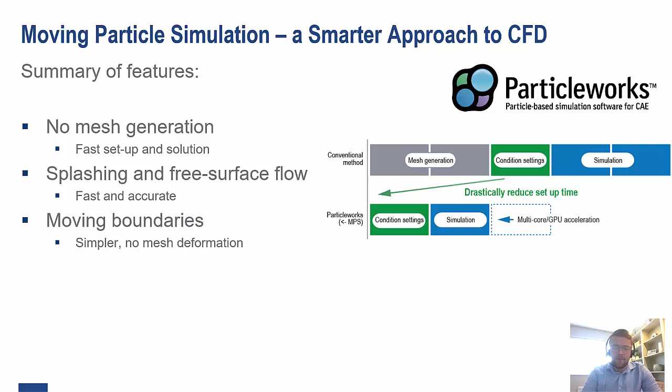And again, without the necessity of a mesh, moving boundaries are far simpler to deal with. So we don't have to worry about things like mesh overlap, mesh deformation. Overall, it just means that our pre-processing time is far, far lower than a traditional mesh-based CFD. Now, the physics behind the MPS method is exactly the same as traditional CFD. It's still solving the Navier-Stokes equation. However, it's just a question of how we solve those equations.

So the MPS method was actually originally proposed by Professor Koshizuka of the University of Tokyo, and he is one of the co-founders of Prometech Software, the company that develops ParticleWorks, back in 1996. Now, ParticleWorks is actually the only tool on the market which uses the MPS method.

There are other particle-based CFD tools on the market that use a methodology called Smoothed Particle Hydrodynamics, or SPH. However, this methodology was developed for compressible fluids, and is not well suited for simulation of any fluids that are incompressible. ParticleWorks is the only particle-based CFD tool which was designed for simulation of incompressible fluids.

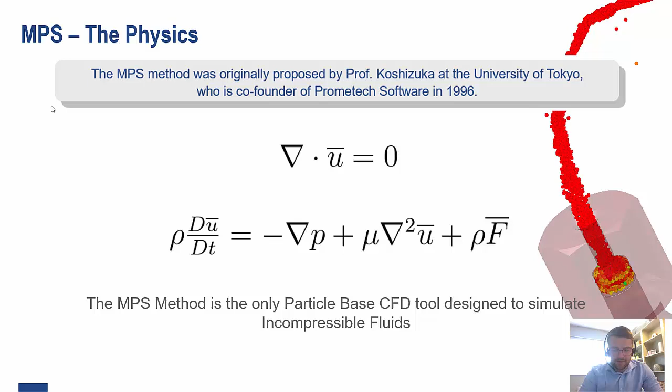So the way that we differ from conventional CFD is how we solve the Navier-Stokes equation. So conventional CFD is solving on the nodes of a fixed mesh. This is like taking the outside point of view of solving the equations, which we could call the Eulerian approach. The MPS method, however, is solving from the point of view of the particles. So we're taking the Lagrangian approach of solving the equations, and this means that the particles kind of act as a moving mesh that moves with the fluid and allows us to resolve the free surface very accurately and in a very efficient manner.

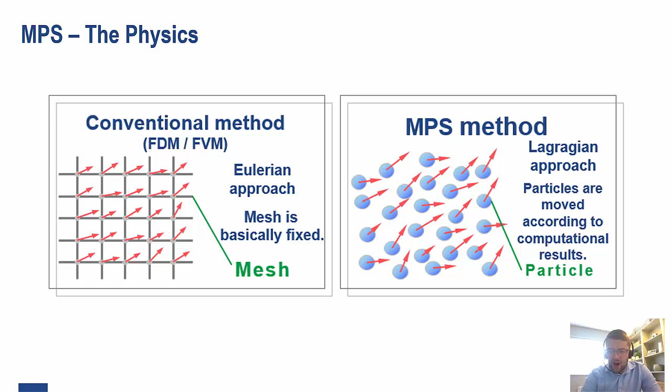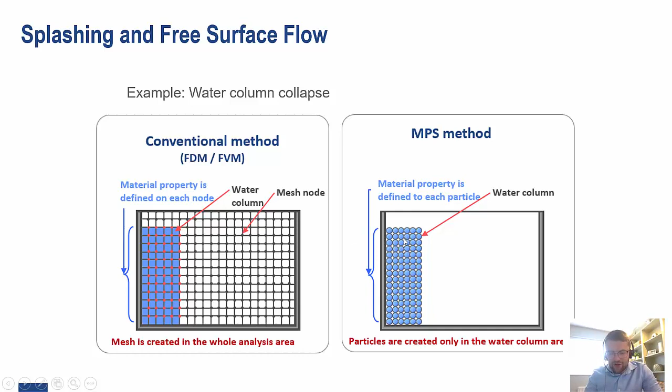The reason this is so efficient is because, well, in the conventional CFD, we are wasting a lot of computational time in regions that we're not interested in. So we can see here that the water is in this blue column on the left-hand side here, but all of these white nodes are just wasted computational time. In the MPS method, we are only solving where the particles actually are, so far more efficient before we even start the simulation.

As the simulation then progresses and the free surface evolves and moves, we can see that the only way we can capture that free surface accurately at all time steps is to have a very fine mesh throughout the entire domain, which clearly is going to massively increase the number of nodes and massively increase the computational cost of our simulation.

Now, in the MPS method, there's no requirement for a fine mesh everywhere. The particles will act as their own mesh, and it means that we're able to resolve that free surface very accurately, even if we didn't know the fluid was going to go into that region. So you can see in this case, we've hit this far wall and splashed up and out of the box.

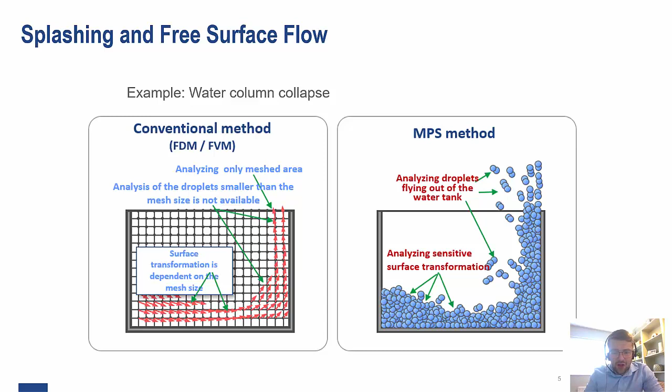However, we're still capturing that free surface very accurately, whereas in the conventional method, we may not have realized that the fluid is going to go into this region, so we either haven't meshed in that region at all, or we've simply meshed it very coarsely, which means that we're going to lose information and overall the accuracy of the simulation.

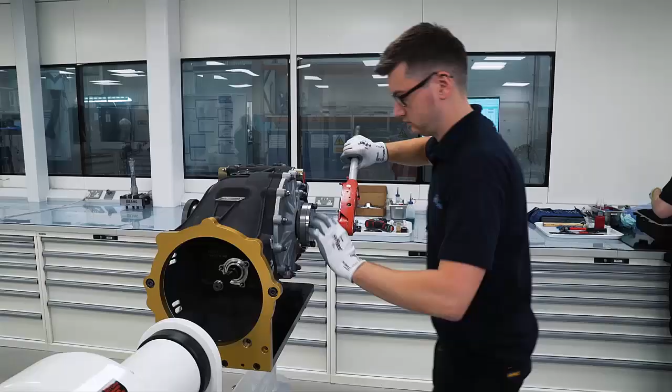Lubrication has always been of paramount importance within the transmission, and whilst we have the tools to analyse the pressurised system, the splash element has always been a best guess during the design phase. This means that in order to prove our thinking, we had to deploy costly 3D printed clear casings and produce a full set of the components of the design to run on our gimbal rig.

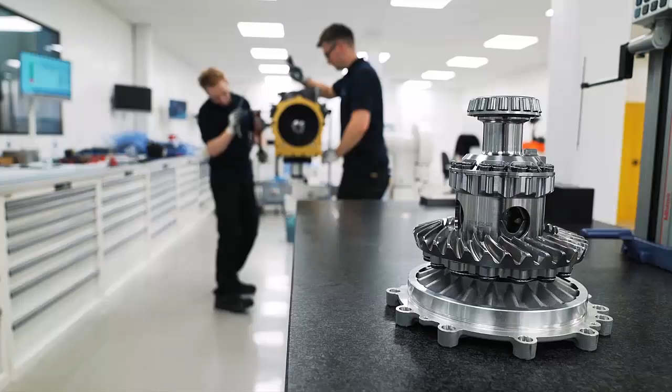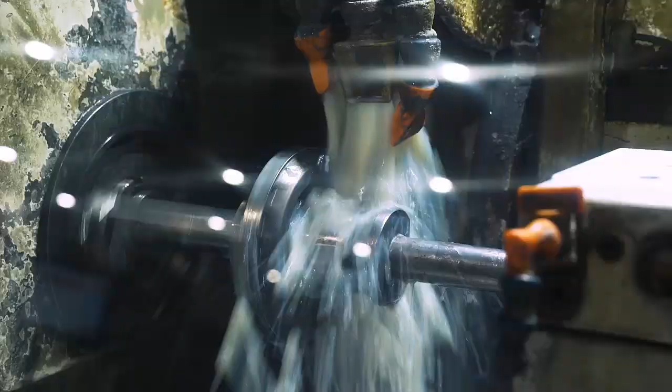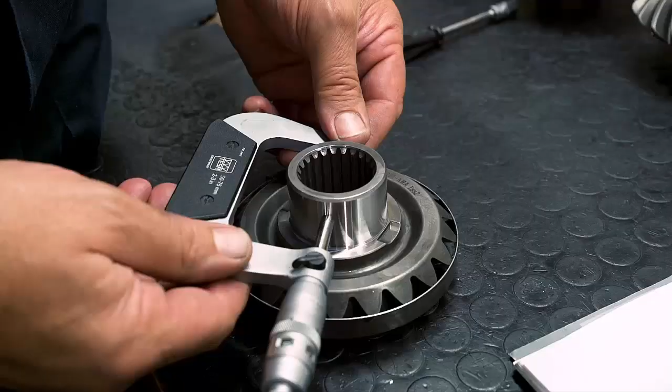The downsides to this is having to produce the 3D casings. They're costly, it's time consuming. We have to have a full set of internal parts produced before we can test. And in motorsport, time is always the biggest challenge. There's always a lot of pressure from the customer. There's always a lot of internal pressure to get the project finished on time, delivered, and right first time.

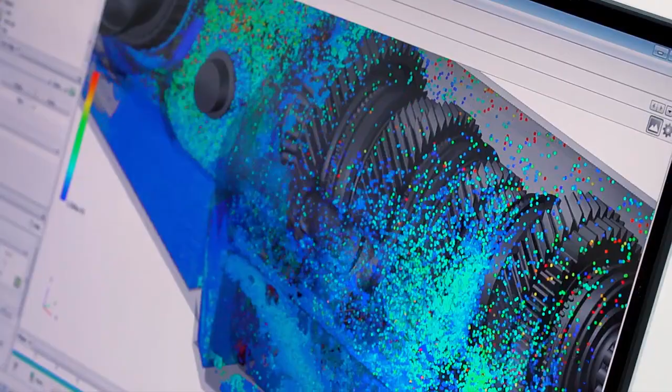We've always been aware of traditional mesh-based CFD and that it could help us in this situation and give us an upfront look at the problems that may arise. We became aware of particle simulation and started to investigate the tools available, as it seemed like the perfect solution to our problem. So EnginSoft arranged a trial for us. During that time we did some testing, so correlation testing, virtual versus reality if you will, and I have to admit I was surprised by the correlation that we achieved.

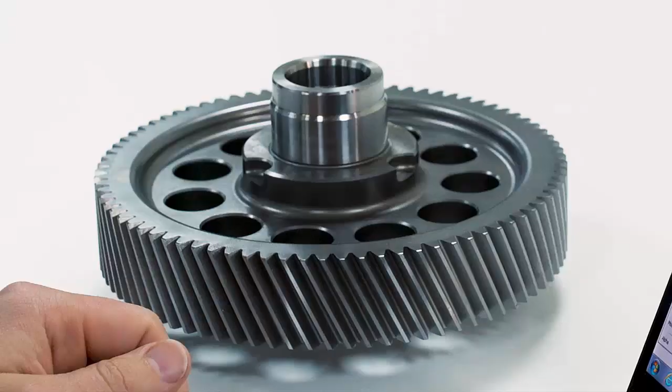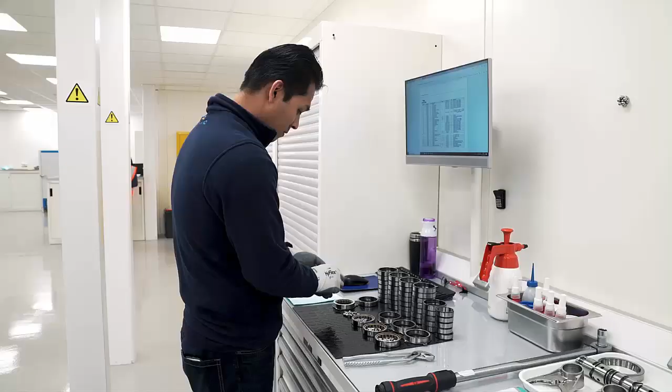EnginSoft and Particleworks stood out to us, basically in terms of both the ease of use of the software, the solve time and the support structure surrounding the software. That allows us the ability to deliver a right first time project, meaning that we don't need to have an expensive prototype test rig. Training other members of the team to use it has been very easy. It seems very easy to pick up and be able to run simulations very, very quickly.

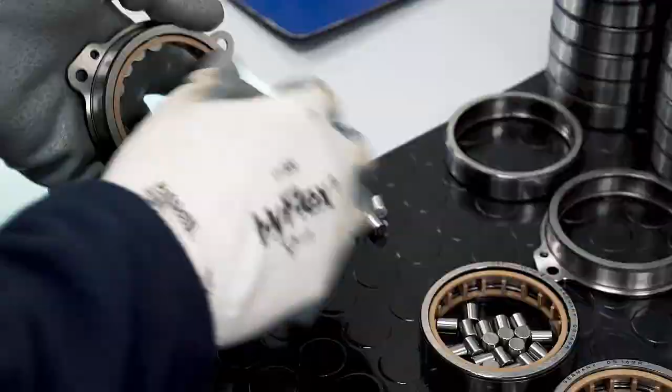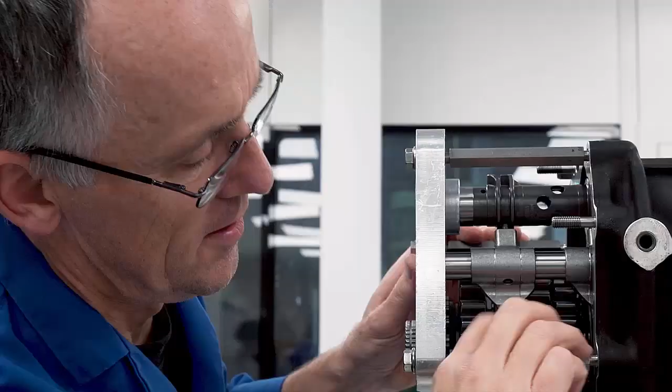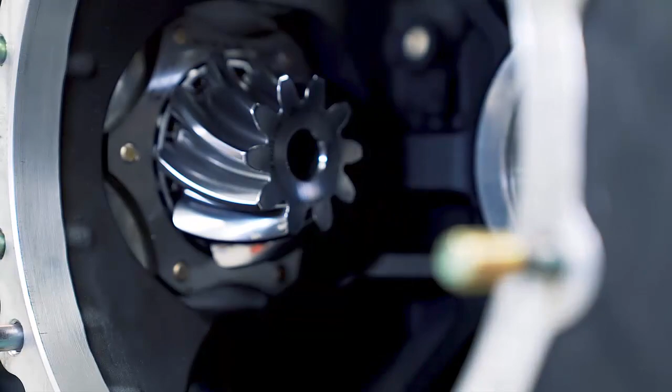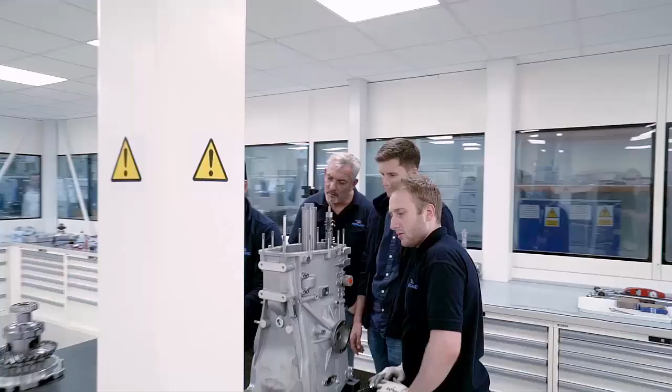During the trial period, we saw so much benefit from the software that the transition to a full license became an easy decision. Overall, this method offers us a huge time saving and allows us to do this work up at the front end of the project rather than at the end. Typically, we would go from CAD to test in around 10 to 12 weeks. With Particleworks, we can do that in 3 days. I feel that having this capability gives us an edge over our competitors.

There are many other benefits and improvements that we're finding all the time due to the insight given to us by Particleworks. The motorsport industry moves at such a fast pace that it's vitally important that Hewland stay on top of new technologies. Efficiency is becoming more and more critical in transmission design, and having the upfront capability allows us to minimise losses due to churning and run lower oil volumes, resulting in lower overall mass. EnginSoft have been a great partner to have on this journey. Their knowledge and their support have been invaluable to us and second to none.

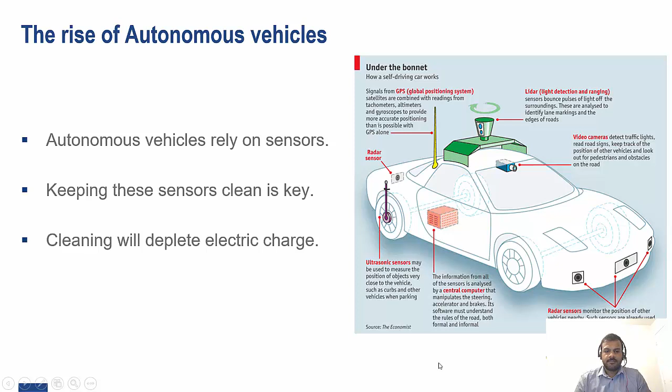So discussing vehicle soiling. What is soiling? Well, soiling is the accumulation of dust, dirt, mud, and any other contaminants on the vehicle's surface. In this particular case, we're focusing on the sensors, and this soiling on sensors can affect their ability to accurately perceive the surroundings, and this could, as mentioned, compromise passenger safety.

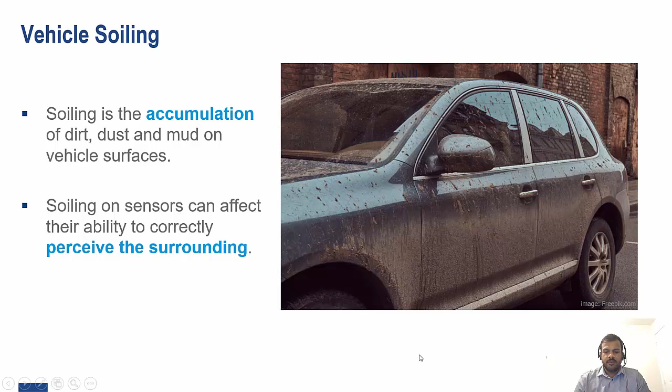So what are the problems surrounding this, and what are we trying to do? One of the key things is to reduce the soiling rate on the sensors. This was presented by David in terms of how we can provide the correct countermeasures to reduce the soiling rate. But as we know, we can't eliminate soiling entirely. There will always be some sort of dirt or contamination on the sensors.

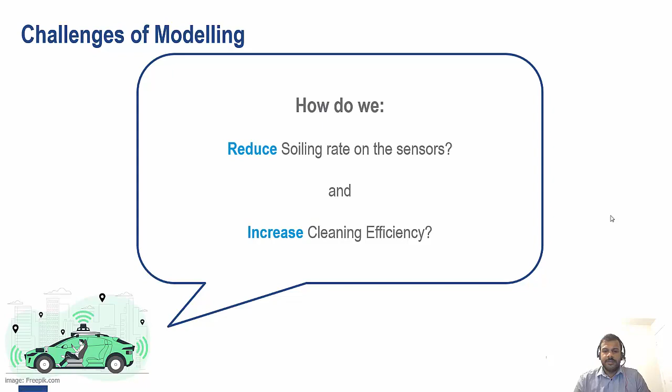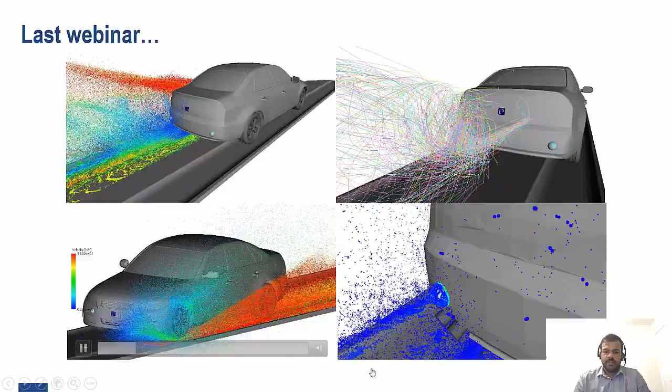So the next step is thinking about how we can clean these sensors, but also how we can clean them efficiently, making sure we're using the minimum amount of energy and that they are cleaned as quickly as possible. This is a highlight reel of the last webinar, simulating the soiling, whether it's self-soiling or soiling from other vehicles and contaminants. And we can see on the bottom right the occlusion on the sensor itself.

For this webinar, we're looking at the cleaning of these sensors. It's very important to keep the sensors clean, but it's quite difficult to physically test these cleaning systems, as we haven't got a vehicle design or one manufactured to design the system around. It can be very expensive, and it's quite late in the design process. So it's very important to bring this forward to the design phase, so we have some analysis with concept designs and at least a starting point when we start to create a physical prototype.

Then focusing on simulation, structural analysis is not sufficient for some of these cleaning systems, especially the one we're going to present, which is based on a wiper blade. It's a very dynamic system with very large translation, motion and deformation, so a static structural analysis is not sufficient. Also, mesh-based CFD is incapable of including the soiled surface that we're going to use in this analysis, and it's unable to efficiently co-simulate or couple with a dynamic or structural analysis.

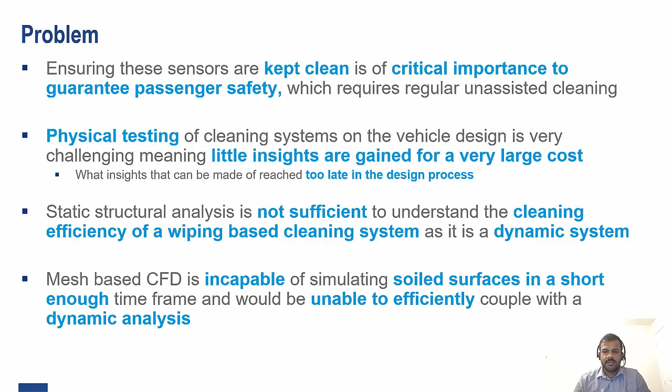So what's the solution that we propose? It's to use a multi-body dynamics tool that's able to include flexible bodies and couple that with a particle-based CFD tool. In this case, we're using RecurDyn as our multi-body tool and Particleworks as a particle-based CFD tool. Particleworks uses the MPS method, which is a mesh-free particle-based modeling methodology.

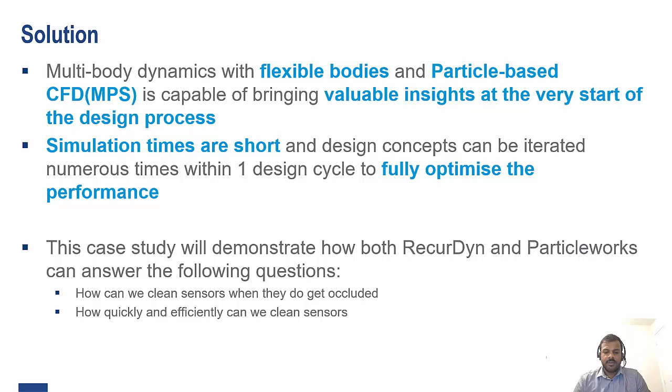The key reason for using these tools is we've got very short simulation times, which means you can iterate through many design concepts and parameters to find an optimized solution for our problem. This case study will demonstrate how we can use RecurDyn and Particleworks to devise and simulate a cleaning system to clean off a mud-occluded sensor, and also discuss how we can quickly and efficiently clean those sensors.

So just to give you an insight into Recurdyn, Recurdyn's a multi-body dynamic software with the inclusion of flexible bodies. That's very useful for us engineers to help to design the correct actuators and define the correct loads to apply the motion that we require. It's good to understand both the motion but also the load transfer between different parts.

And it's also very important, with the inclusion of flexible bodies, it can help us to carry out some structural analysis and understand strength results and fatigue results, and whether the system or the specific part is able to cope with the loads that we have defined.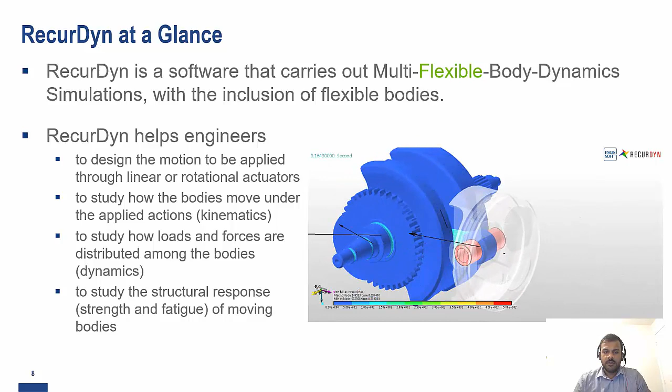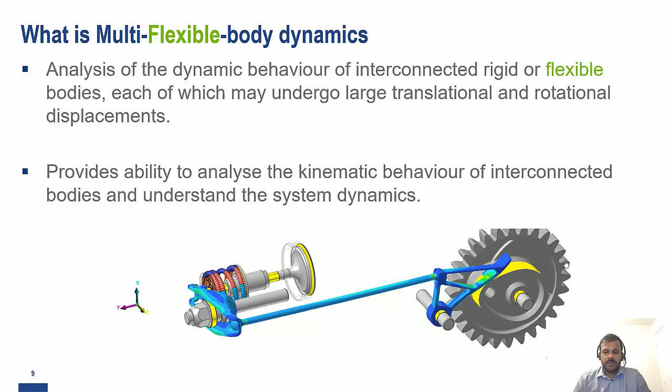So what is multi-flexible body dynamics? Well, it's essentially the ability to include flexible bodies in a multi-body dynamic environment. And by dynamic, we mean a system where we have large translational and rotational displacements. So it's very important to have the capability to include flexible bodies in the system, so we can understand as a whole how the system will function and whether there are any specific limitations.

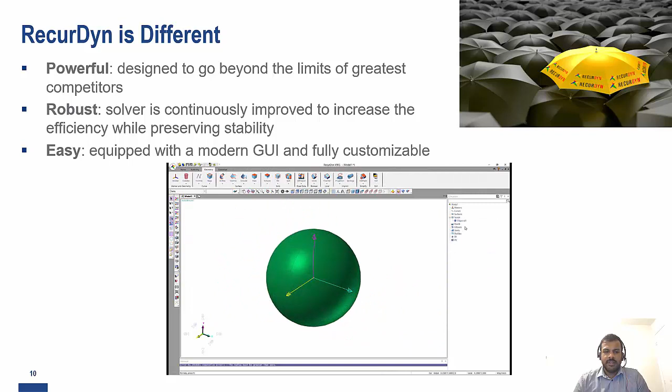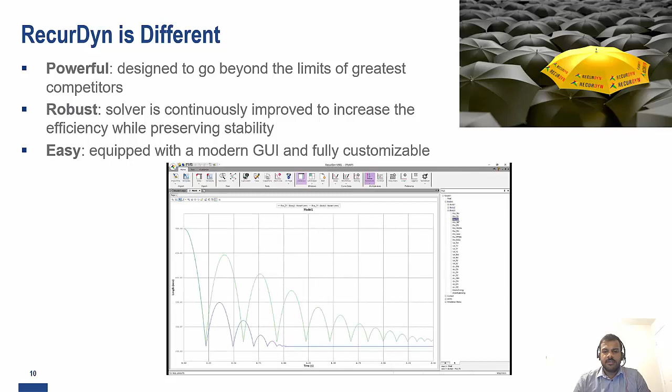So why Recurdyn? Well, Recurdyn's a powerful tool. It's able to model rigid body systems with many parts, many contacts, and also able to include flexible bodies, and this includes linear materials, non-linear materials, and also hyperelastic materials. It's also very robust, and it's used for a variety of applications. So it's not a one-trick pony, but can be used for gearboxes, vehicle suspension systems, and even printing devices.

And it's got a very intuitive GUI, a very modern GUI, which is very easy to use, very easy to view the model and to post-process the model. And as it's very intuitive, it's very easy to get to grips with it.

So Recurdyn has a wide range of contact methodologies available. It's able to conduct analytical contacts, which are based on primitive shapes, which are very efficient, but it's also able to use general contacts, which essentially take any general surface, any surface from a CAD body, and define that as a contact surface. It does this by discretizing the surface with a surface mesh and using that to define the contact boundary.

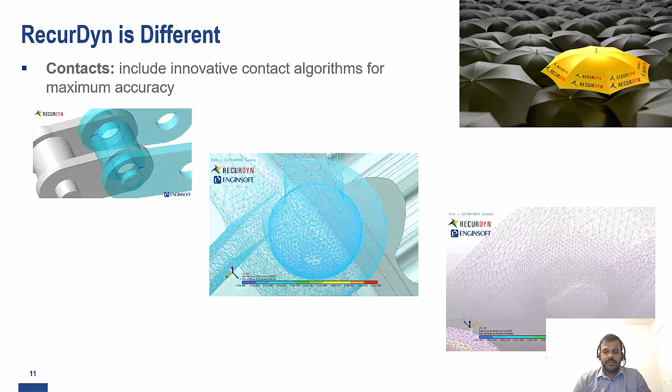Recurdyn also has various tools such as smoothing capabilities to provide a very accurate contact force. So it's got a very good contact technology, and one of the plus points and benefits of it is it's very efficient. So it's able to include many contacts for a very small computational cost.

And as mentioned, the USP of Recurdyn is its ability to include flexible bodies efficiently. Recurdyn does this by including a common solver for both the dynamics solving and the flexible solving. There's two main methods that Recurdyn uses for flexible analysis, one being the RFlex method, which is a reduced flex method, and that's primarily used where we have fixed boundary conditions, fixed points of contact, and that uses a modal reduction system.

So it's very efficient. But if we have a more complex problem, which requires moving boundaries, moving contacts, moving constraints, as we can see with this particular sheet example, then it's also able to do a co-simulation essentially between an FE analysis and a dynamic analysis. And as I mentioned, it's quite efficient because it's using a common solver to do so.

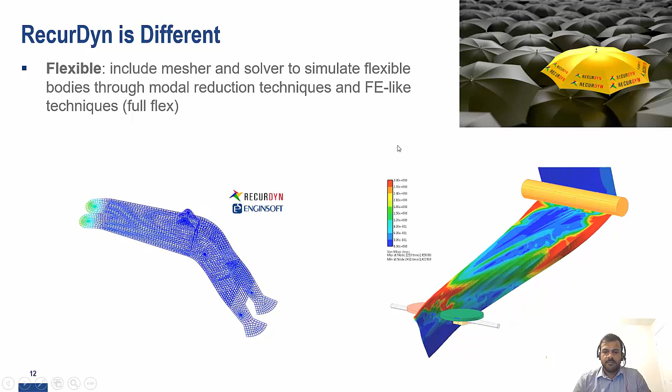Right, in this particular case study, we'll be making use of Recurdyn's capability to co-simulate with Particleworks. So there's a direct connection between them, and it's what we call a two-way coupling. The fluid loads from the Particleworks model can be transmitted to the Recurdyn model, so we can see the effect it has on the various bodies. But likewise, the kinematic motion of the bodies can then be transferred back to the fluid, so we can see the effect from the bodies to the fluid. So this is what we call a two-way coupled simulation.

And Recurdyn and Particleworks work well together, even in terms of solving. Recurdyn runs on the CPU, whereas Particleworks is able to run on the GPU. So there's no compromise or clash between the two solvers in terms of resource allocation.

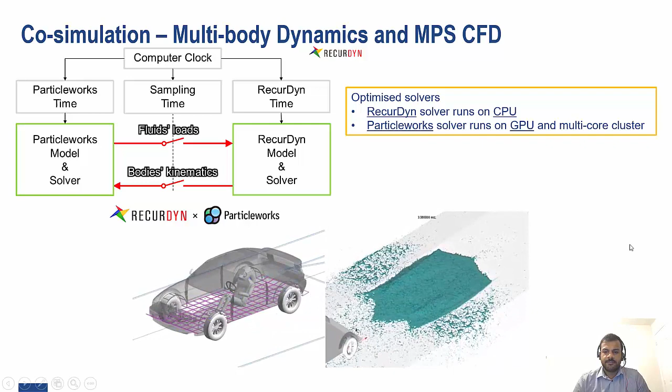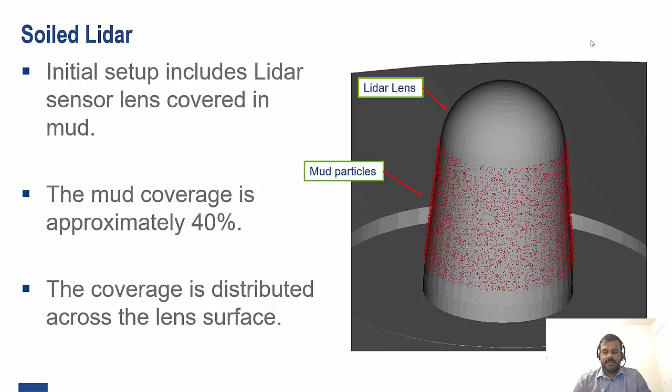So looking at the particular case, we're looking at a soiled LiDAR case. What we've got here is a roof-mounted LiDAR with some mud particles covering the lens. In this particular case, we've got about 40% of the lens covered in mud, and that's distributed across the lens surface. So this is quite a worst case scenario with quite a lot of coverage on the sensor. But this will be good to try and evaluate the various cleaning systems that we're going to look at. And one of the ways we'll be trying to clean it is using the wiping system.

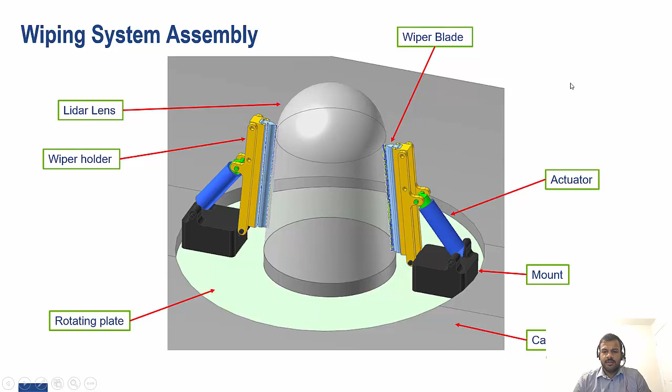So this is a sketch or an image of the assembly. We've got the roof of the vehicle, a rotating plate, which will be rotating these two wiper systems. We've got two wiper blades cleaning the lens. What we also have is an actuator system, so it's actually spring actuated. We've got a spring that pushes against the wiper blade holder, which in turn pushes the blade towards the lens.

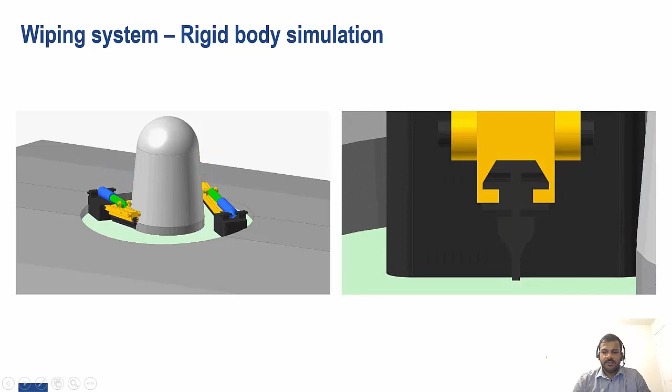So this is the first step, which is to build the system first. So this is a fully rigid body simulation. We can see on the right the wiper blade, which is, as mentioned, very rigid. So we saw no flexibility in the wiper blade. But this is an important step to evaluate if the multi-body dynamic system in the first case is modeled correctly.

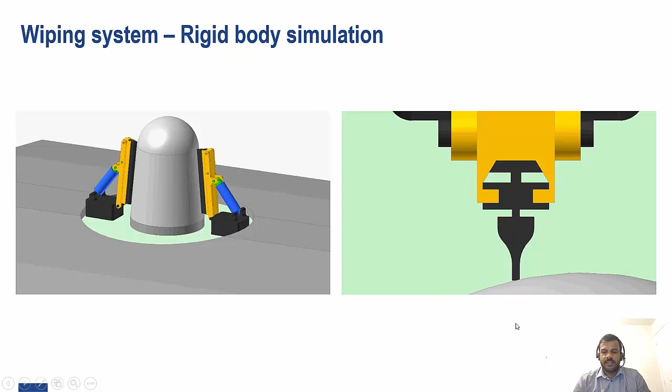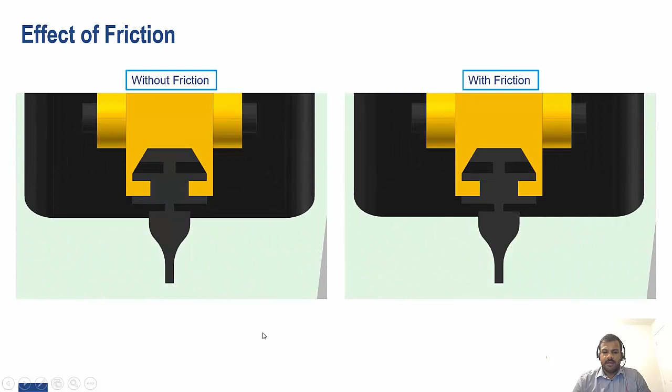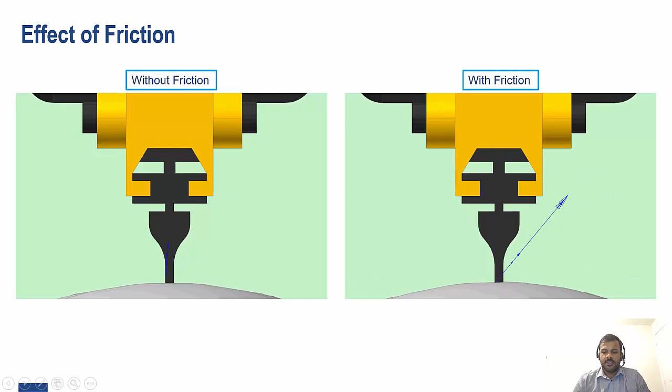Here we can see the different effects of including and not including friction. So we can see on the left, without friction, we have only a normal component of the contact force there. But on the right hand side, we've got a diagonal force, which includes a tangential frictional force component.

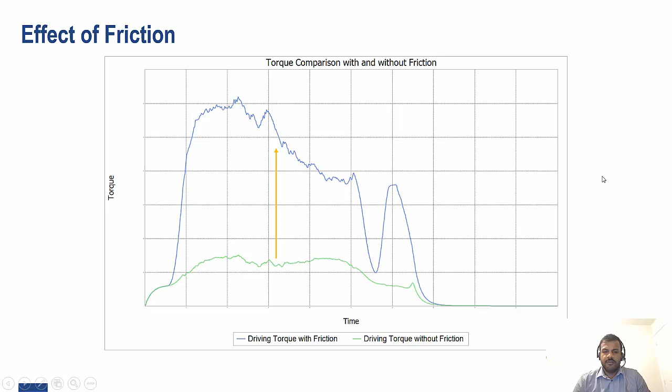So in this case, we've taken this wiper blade model and sectioned it into 4 different parts. 2 of the parts will be rigid, 2 of the parts will be flexible, and the flexible parts are the blade tip and also the central section. And the reason for making those 2 parts flexible is, as I mentioned, they're the parts that will be deformed most significantly, while the other parts, which are more in a block structure, are likely to remain not as deformed as those ends. And the reason for doing this is to have an efficient simulation where we're able to run this design very quickly.

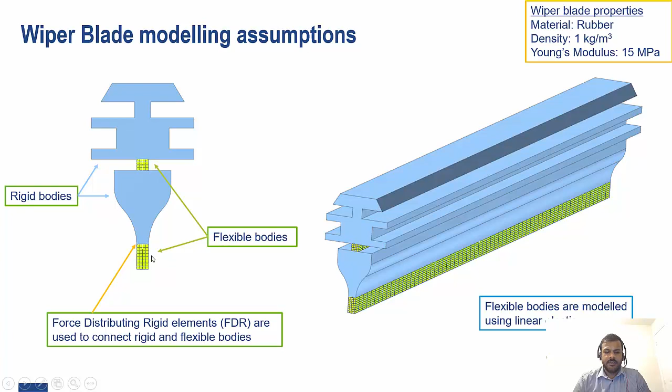RecurDyn is very clever in terms of connecting or separating the bodies, and one of the key features to make this possible is the ability to have force distributing rigid elements, and these are sort of rigid body elements or RBE elements if you've used finite element analysis, but they're essentially used to connect the surface of the flexible body to the rigid body.

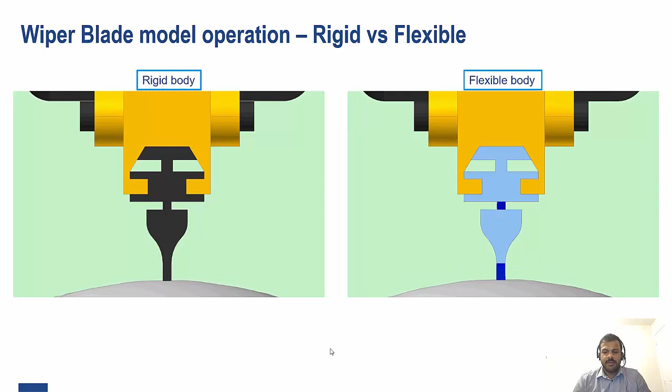So here we can see a comparison of the rigid body on the left and the flexible body. As you can see, the model on the right is functioning more like we'd expect, with the blade tip and the center of the wiper blade being able to deform.

Okay, so the cleaning simulations that we're going to investigate are one using just spraying some washing fluid on the LiDAR with no wiping mechanism. The next phase is to use the wiping mechanism only, and then the third will be a mixture of the two, so using a wiper blade with washing fluid.

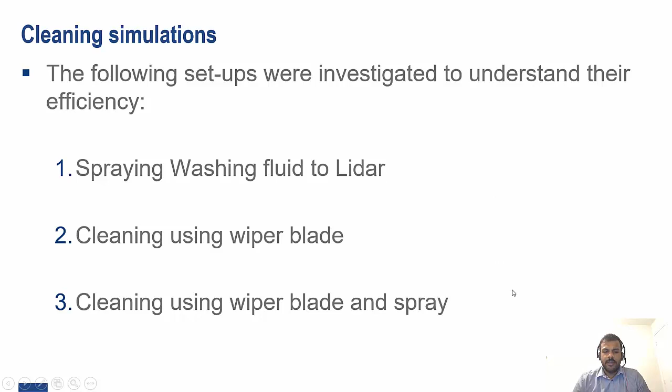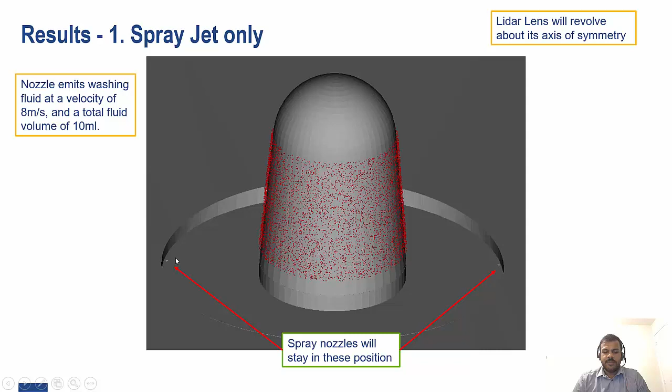So this is the model with only the spray jets. So we've got the soiled LiDAR, and we've got a jet on each side, so that's essentially a spray nozzle. In this particular model, we've kept the spray nozzles in the same place, but have a rotating lens. The reason being it's quite difficult to implement a system where we've got rotating jets. So this system makes use of having static jets and a rotating lens.

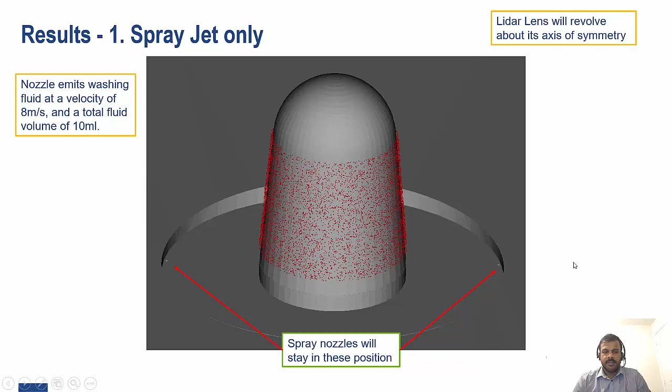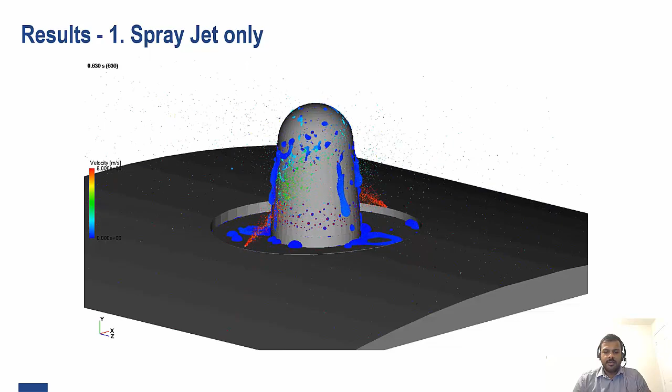So this is the output from the simulation. As you can see, we've got the interaction between the washer fluid and the mud. We can see the washer fluid able to displace the mud, but obviously what we can see towards the end is that it's not able to fully get rid of all the mud.

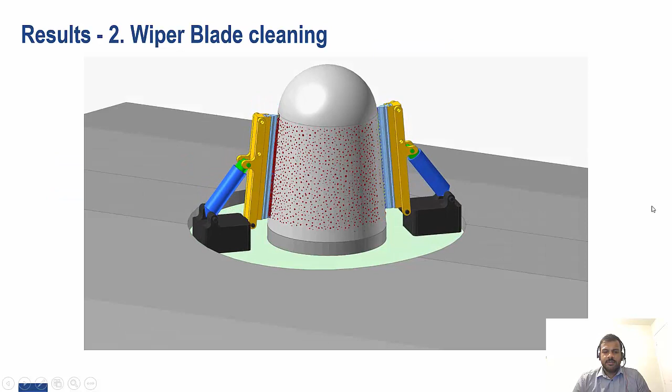The next simulation we're going to see is, as I mentioned, the wiping of the LiDAR. In this case, there's no cleaning fluid included. It's purely just trying to use the wiper blade, which will be rotating to clear the mud. And here you can see the simulation. So actually it's quite efficient in doing this.

You can see the wiper blade being able to flex and also sort of collect the mud and then get rid of it once it's being moved away from the lens. As you can see, there is some mud that remains on the sensor, but overall it's done quite a good job to clean the LiDAR.

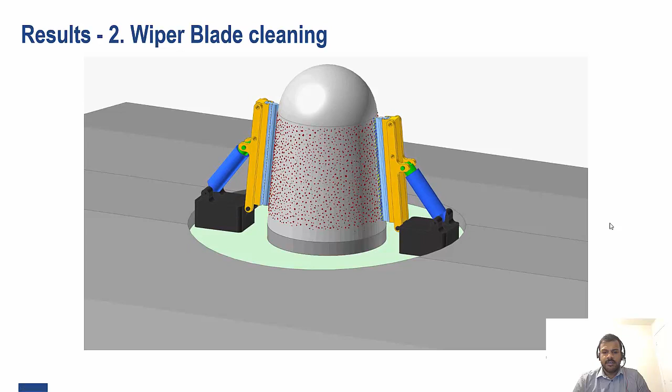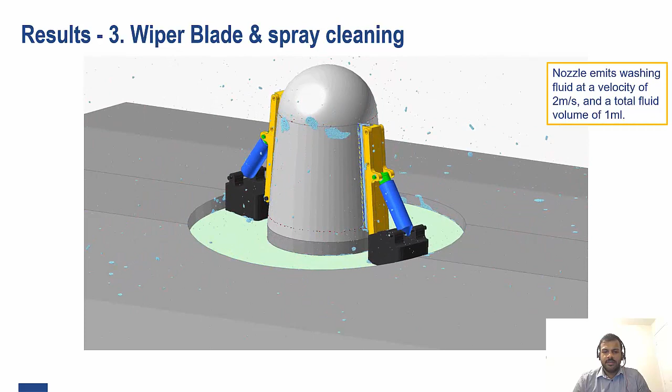And this is the final setup where we've got a washer jet just to wet the surface and also the wiper blade as well. So what we can see is the water does help to try and displace some of the initial mud, but also wets the surface, so loosens up some of the mud. But overall it has a very similar efficiency to what we had before with our wiper blade system.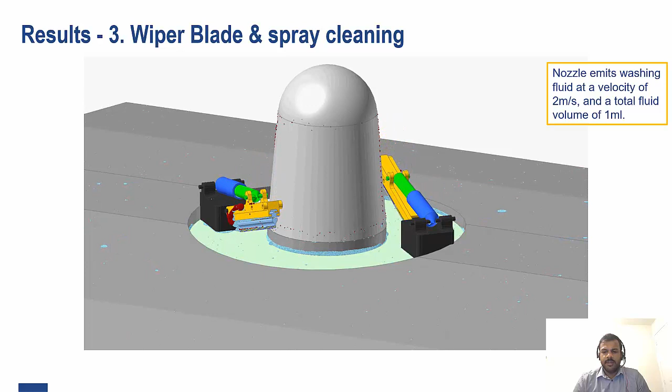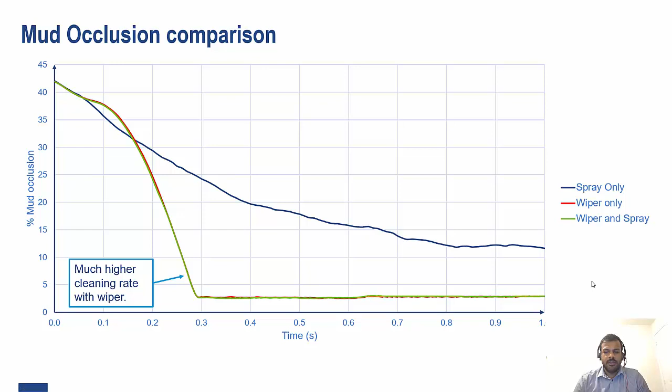Now in this particular case we've used a particular type of mud, and if you try to use something that's slightly thicker or stickier or even simulate dry mud, then we may be able to see a difference between using the wiper only and wiper and spray, but that's a future simulation.

Okay, so in summary we've seen how RecurDyn, with its capability of including flexible bodies in a multi-body dynamic environment, is able to analyze complex systems using both rigid and flexible bodies. In this case, we've actually used the same parts split into sections of rigid and flexible bodies. And that's what we're able to do to create efficient models and provide very fast and accurate simulations.

One section that we include is the ability to also co-simulate with control systems. RecurDyn has its own control system modeling tool called CoLink, but it can also interact with other systems modeling tools such as Simulink and MapleSim. It also has the capability to connect through an FMU.

So what does the simulation allow us to do? It would allow OEMs to determine an optimal configuration. There are various parameters that we can change to get to an optimized solution for different conditions. And we're able to create an optimal configuration for passive and active systems to help reduce sensor blindness.

This optimization allows us to make sure the sensors are operational at all times, improves passenger safety, but also thinking about trying to increase the range of the vehicles. So it's important to make sure that these systems use the least amount of energy so we can maximize the utilization of these vehicles.

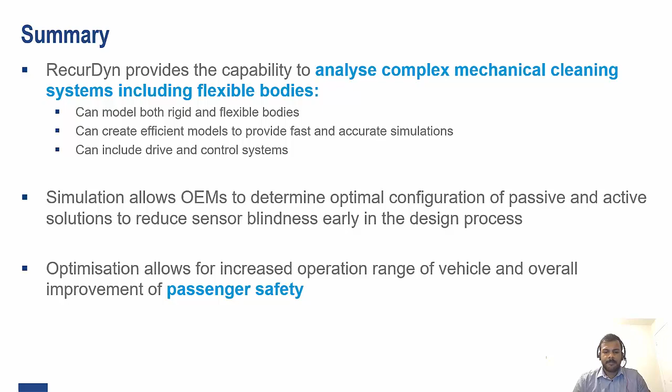Okay, so I'll hand back to Karen, who will let us know if there are any questions. Thank you very much, David, for that recap on Particleworks earlier, and Danajan for helping us understand how RecurDyn can be used with Particleworks to evaluate the efficiency of the cleaning process to reduce sensor blindness early in the design process. Okay, everyone, so this is your chance to ask any questions that you may have on what we've covered today as we move into Q&A.